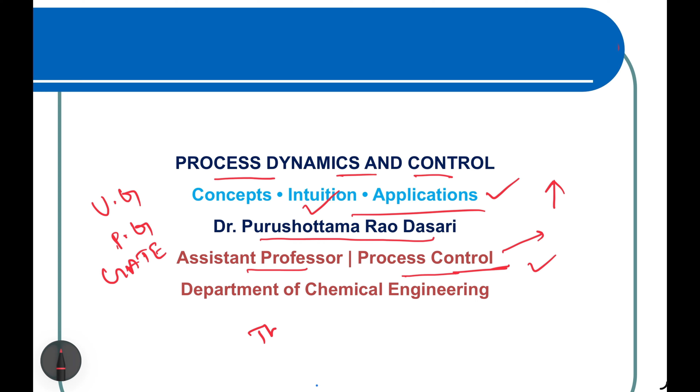This course is useful mainly for undergrad and postgrad chemical engineering students, and GATE aspirants, and anyone who wants a strong foundation in process control. My teaching approach will involve simple explanation, step-by-step derivation, real process examples with applications, and continuous connection between theory and practice.

If you follow this course sequentially, you will be able to understand the smooth transition through this course content. With a brief introduction, let us begin this course.

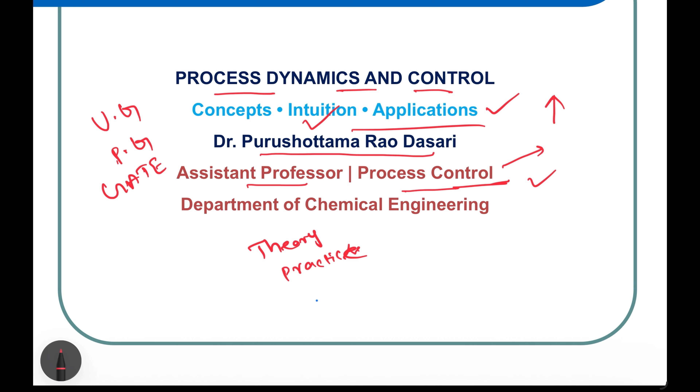In the first part, I will explain the course structure and reference books, and then we will move into the fundamental concepts of process dynamics and control.

Before we begin this actual subject, let us briefly explain how this course will be taught and which textbooks we will follow. In a subject like process dynamics and control, selecting the right book is very important because it shapes the way you understand its concepts.

The main reference book for this course is written by Donald R. Coughanowr, titled Process Systems Analysis and Control. Either you can go for the second edition or third edition. This book is widely followed across universities in India mainly, and abroad. It starts from the fundamentals, explains ideas in a clear and logical manner, and uses examples that are closely related to real chemical engineering processes.

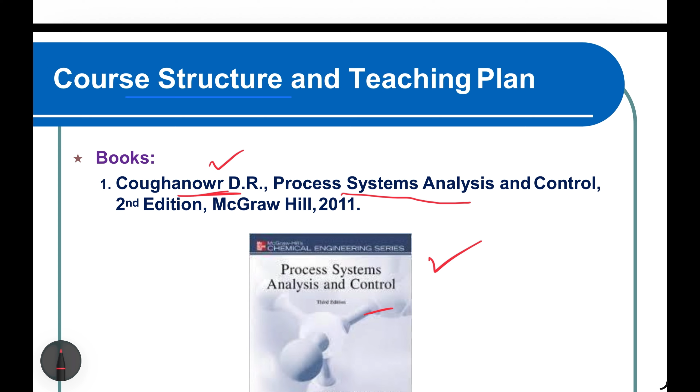I have chosen this book because it helps you understand not only how to solve the problems, but also why process control is essential in real industrial plants.

In my lectures, I will use this book only as a reference and explain all topics in my own words with a strong emphasis on intuition, physical understanding, and practical applications. If you attend these lectures regularly and focus on understanding these ideas, you will find semester examinations, GATE questions, and advanced control subjects much easier and more confident to handle.

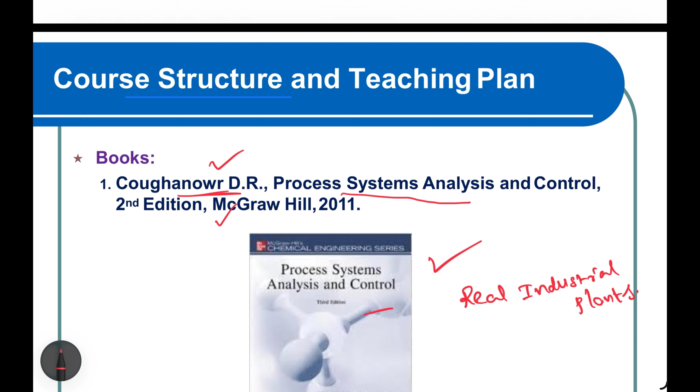We will also refer to this book, Process Dynamics and Control by Seborg. This book will be used only to understand the concepts more clearly whenever we require deep analysis.

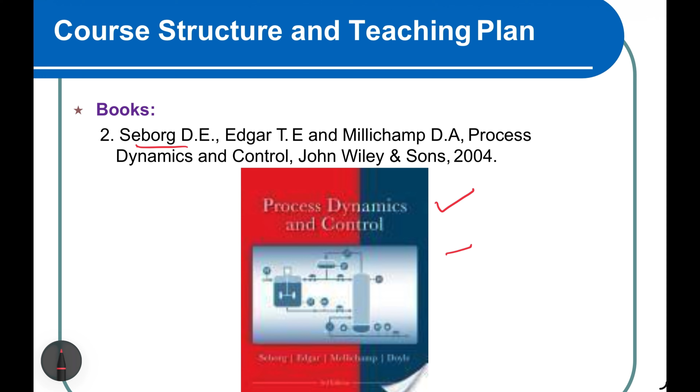We will also refer to the book Chemical Process Control by George Stephanopoulos. This book will be used only for understanding the overall process control philosophy and industrial viewpoint when we need it.

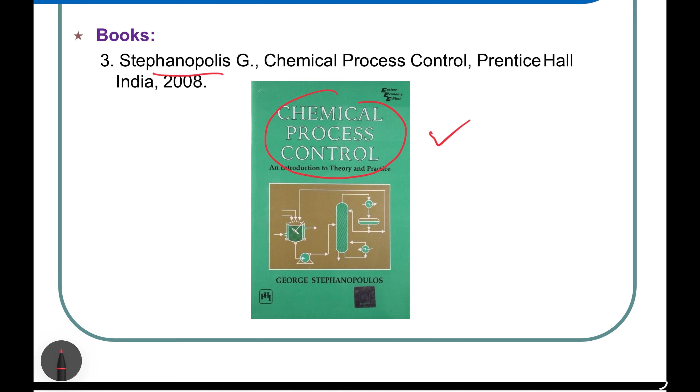We will also refer to the book Process Control: Modeling, Design and Simulation by Bequette. This book will be used mainly to understand the modeling and simulation aspects of process control.

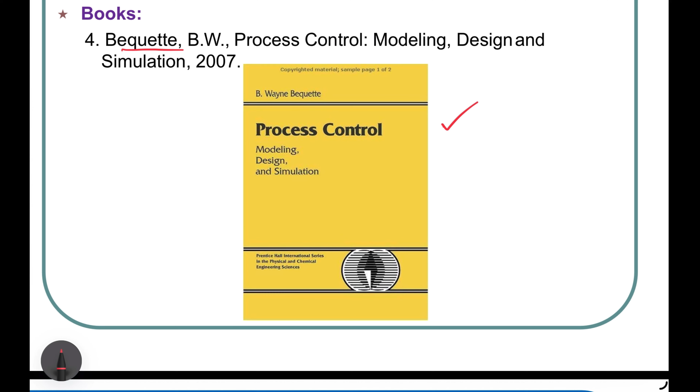Now let us understand what we mean by controlling a process. When we say that we are controlling a process system, it simply means that we are trying to influence the way the process operates. This influence can be in the form of guiding the process or regulating it, so that the process gives us a desired outcome. In other words, control means making the process behave the way we want.

In fact, you may have already seen many examples of control in laboratory experiments. For example, if you take a heating water bath, a control unit is used to maintain the temperature at a desired value, however much we want to maintain it. Even if the surroundings change, the controller needs to adjust the heating so that the temperature remains constant. Similarly, the pressure regulator...

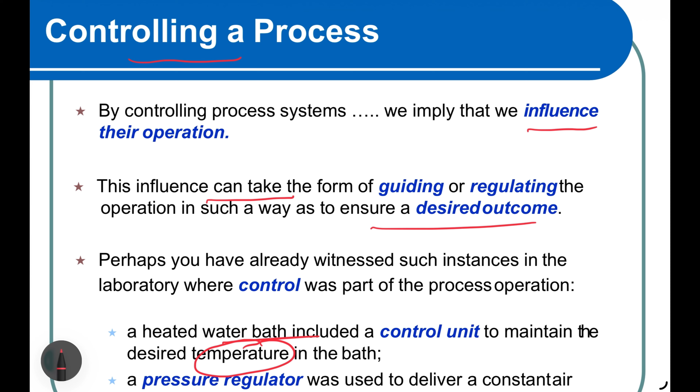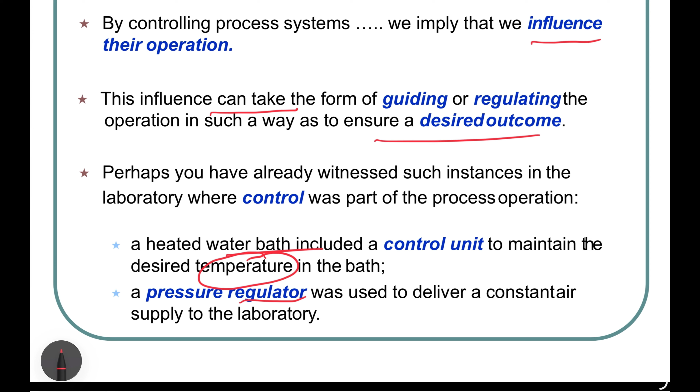It is used to supply air at constant pressure, and remain steady - that's what we want. So these are simple examples, because control is already a part of many process operations.

In all examples we discussed earlier, you may notice that the control unit is always present. The main role of this control unit is to ensure that the process operates in a steady state and in the desired manner - what exactly we want.

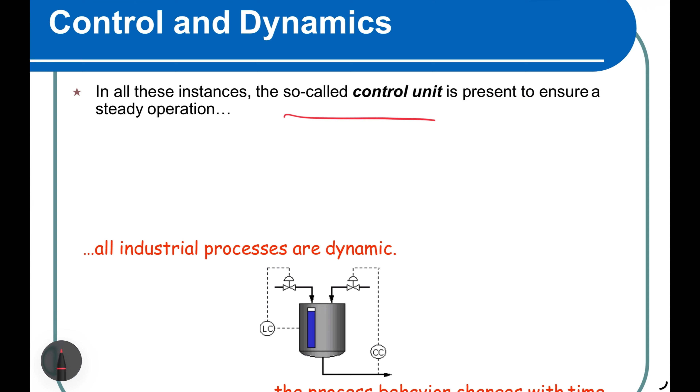However, it is important to understand one key point: all industrial processes are dynamic in nature. That means the process variables do not remain constant automatically.

In simple words, the behavior of the process changes with time. When there is a change in the input, the output does not respond instantly - it responds gradually.

Even a disturbance, such as a change in the feed, temperature, or environmental cause, may make the process vary with time. Because of this dynamic nature and behavior, we cannot rely on the process to remain steady by itself - that is why control is required.

Control is needed to continuously adjust the process and keep it close to our desired operating condition - that means our set point.

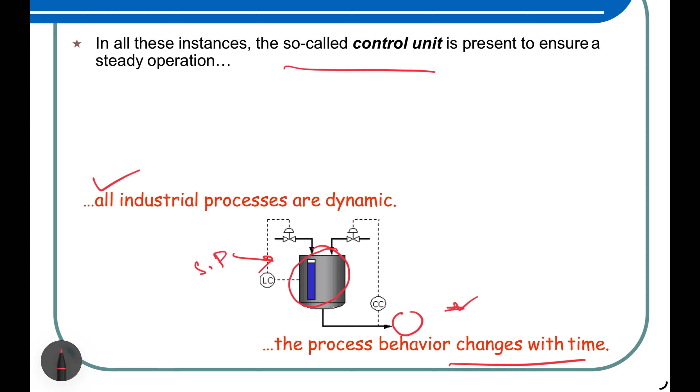Let us see the role of control engineering. A control engineer has two main responsibilities. First,

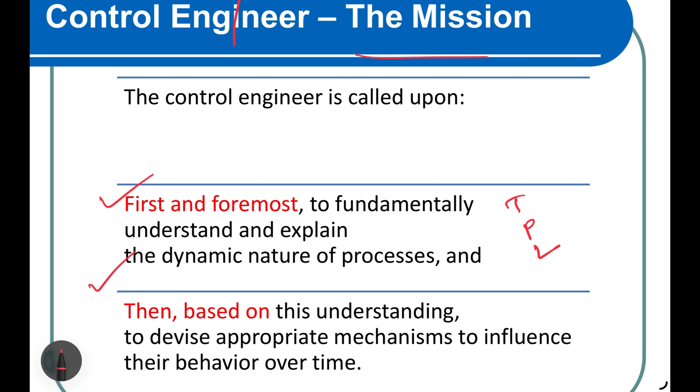the control engineer must understand how the process behaves with time - how variables like temperature, pressure, and level change when there is a change in the input or when a disturbance occurs.

Next, based on this understanding, the control engineer designs suitable methods to control the process and make it behave in the required manner. So simply speaking, a control engineer must first understand the process and then control the process.

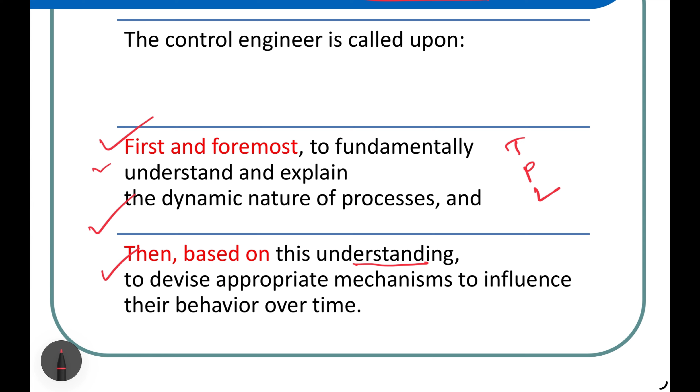These are the main important things for a control engineer. Control engineering is important for every chemical engineer - design engineers must think about how equipment behaves over time,

because real plants do not work at steady state all the time. So plant engineers must handle disturbances and keep the plant running smoothly. Engineers doing experiments must control their equipment properly to get correct final results.

So in final summary, we can say control engineering is needed for design, operation, and experiments.

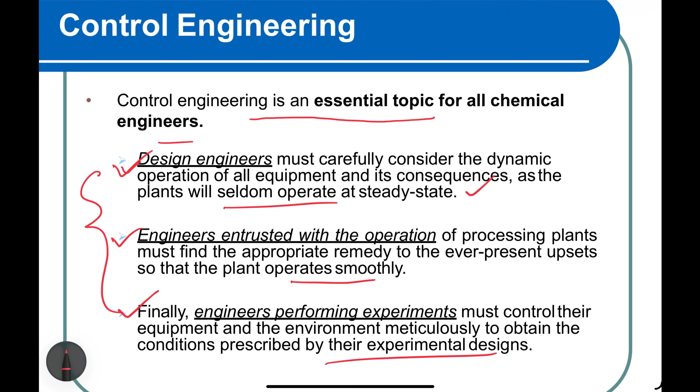Now let us understand why process control is important. In fact, without process control, it is not possible to operate most modern chemical plants. Process control is required to run plants mainly for safety, and it helps the plant operate reliably,

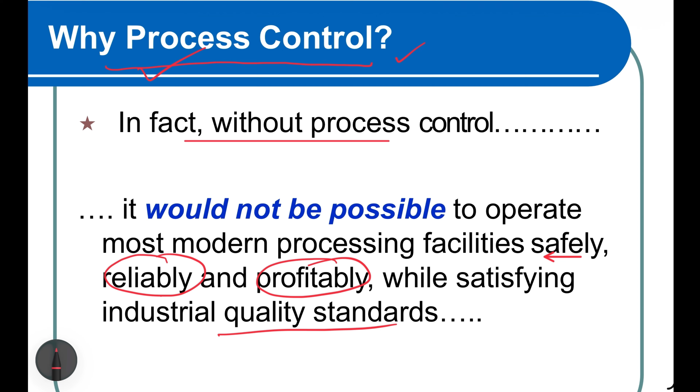without frequent problems - it also helps the plant operate profitably. Finally, process control ensures that industrial quality standards are satisfied. So process control is essential for safety, reliability, profit, and finally quality.

Next we'll discuss control in process industries. Over the years, both the theory and application of process control have changed because of technological developments. With the growth of computers and communication technologies, the role of process control is continuously changing.

Today we can clearly see two roles of process control. The first is the traditional role, where control is mainly used for safety and stable operation. The second is the expanded role, where control is also used for automation, optimization, and better plant management.

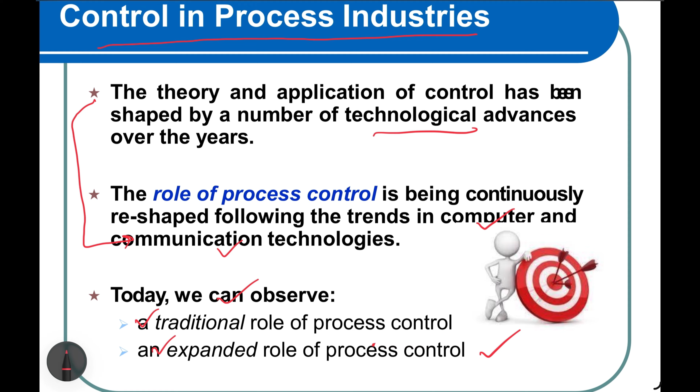So simply, we can say process control has evolved from basic control to advanced computer-based control. Now we will discuss the traditional role of process control.

In industrial operations, process control plays an important role. It helps to maintain safety and environmental impact, and improves process performance. This is done by keeping important process variables close to our desired values.

For example, consider a chemical reactor with a highly exothermic reaction. If the reaction is not properly controlled, temperature can increase rapidly. Many variables can change, and this may lead to liquid overflow or high temperature, which is called runaway. Process control is used to prevent such dangerous situations.

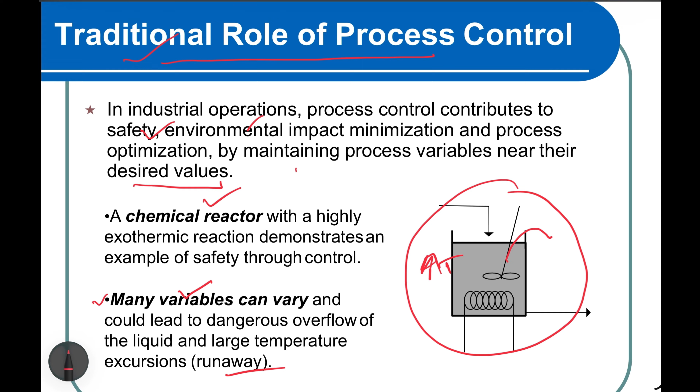Traditional process control mainly focuses on safe and stable operation of the plant.

Now let's see the traditional role of process control with an example. In this example, a control system is used to maintain important variables at their desired values. The first one is the liquid level - the liquid level inside the reactor is maintained near the desired value by adjusting the outlet flow rate. This is done using the level controller.

Next, the reactor temperature. The reactor temperature is maintained near the desired value by adjusting the coolant flow rate, done using the temperature controller. By controlling this level and temperature, the reactor operates safely and smoothly. A good temperature controller also reduces the formation of unwanted byproducts, helping to reduce waste and minimize environmental pollution. So traditional process control keeps the plant safe, stable, and clean.

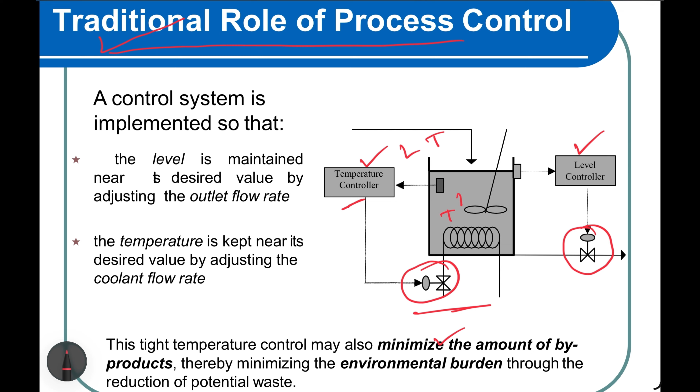Now let us understand the expanded role of process control. A modern industrial plant is made up of many unit operations working together to produce the final product. An important part of such a plant is a control room, where operators continuously monitor the plant operation. Today, computer-based control systems collect data from different units and automatically adjust the process variables, helping to maintain smooth and stable operations.

The main system used for this purpose is called the distributed control system, or DCS. The DCS communicates with field instruments such as sensors and control valves through communication networks. So modern process control uses computers and networks to control the entire plant. This is what is called the expanded role of process control.

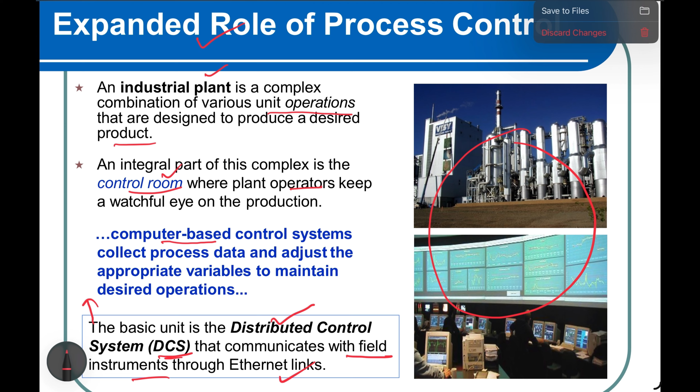Now let us see what is DCS, that means distributed control system, and what it allows plant operators to do. First, the DCS helps to observe important process variables such as temperature, pressure, level, and flow in the control room. Second, it continuously checks for alarms to warn the operator if any variable goes beyond safe limits. Third, the DCS allows the operator to take action whenever required.

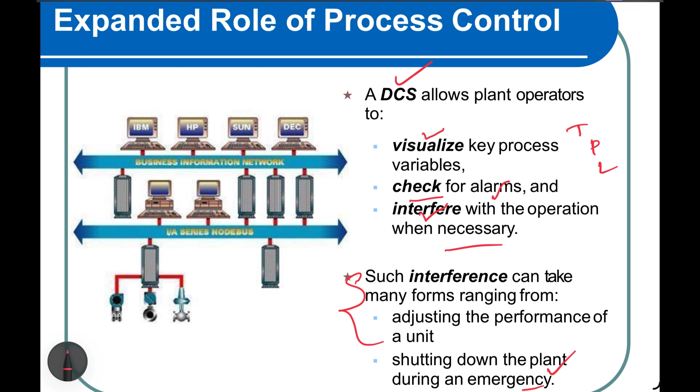This action may include adjusting a unit or shutting down the plant during an emergency. So the DCS helps operators monitor, control, and protect the plant.

This slide shows an example of the control network of a modern industrial plant. Here the control room is the place where plant operators monitor and control the entire process. The computer in the control room displays important information such as temperature, pressure, level, or flow.

The DCS interface shows the process units and control loops in a graphical form. Using this interface, operators can easily understand the plant condition and take necessary control actions. The control room and DCS together form the control center of a chemical plant.

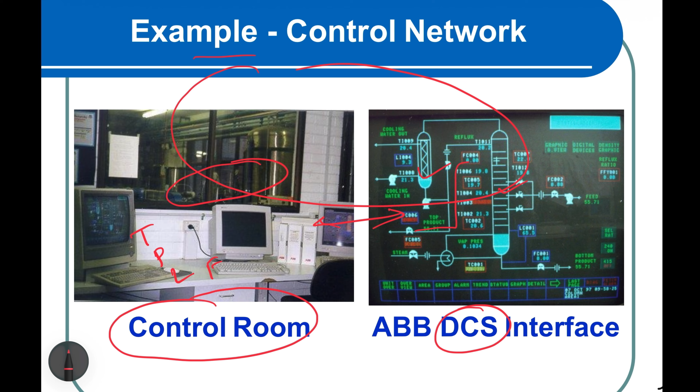Because of advances in computers, the role of process control has expanded significantly. Today, computer-based systems can collect process data and process this information in real time. These systems are used not only for process control but also for online optimization. In addition, computers are used for tasks such as scheduling and production planning. Modern process control covers much more than basic control of a single unit—today's computers play a major role in control, optimization, and plant management.

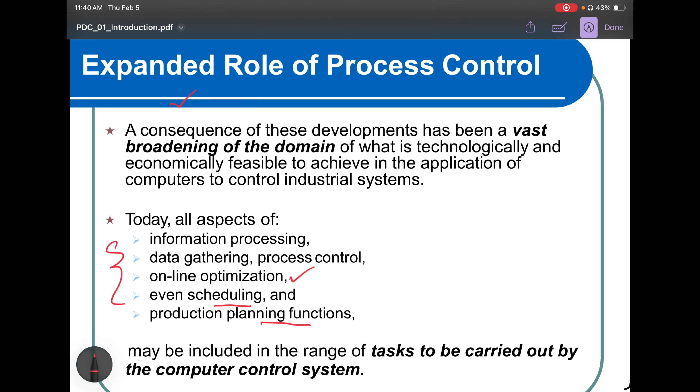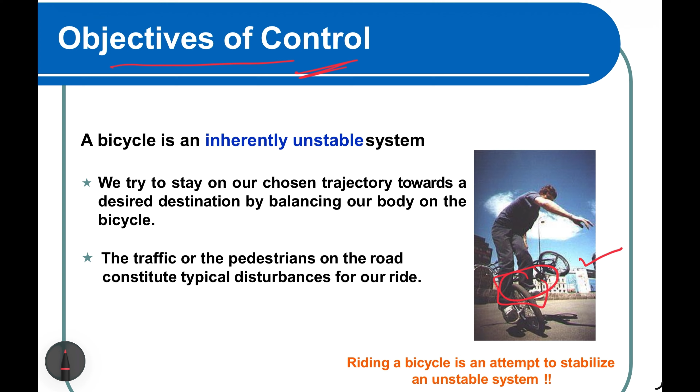Let us understand control using a simple life example. A bicycle is an unstable system—if no action is taken, it will fall. When riding a bicycle, we continuously adjust our balance and steering. Disturbances such as traffic or uneven roads can disrupt this balance, but by continuously correcting our motion, we stabilize the bicycle. This is similar to how a control system works in a process—control means taking continuous action to stabilize an unstable system.

Let us now summarize what we have learned in the introduction to process dynamics and control. Process control helps us regulate the behavior of process systems and make them operate in the desired manner. Good control is very important because it improves safety, ensures smooth operation, and increases plant profitability. We also learned that the role of process control has expanded from basic control to advanced, computer-based, and information-driven control. The main objectives of process control are to maintain stability, achieve good performance, and optimize plant operation. With a clear understanding of process dynamics, engineers can design effective control systems that meet industrial requirements.

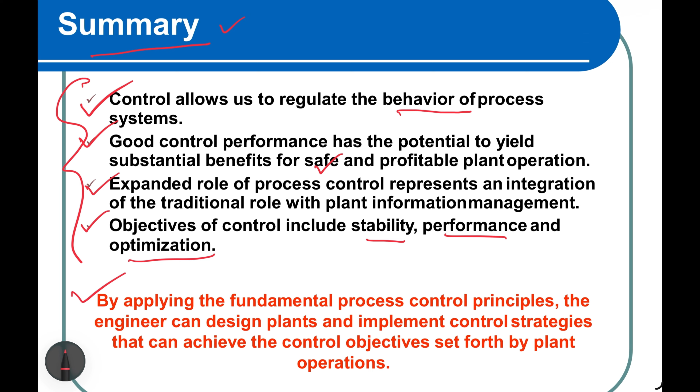This complete understanding forms the foundation for all advanced topics in process dynamics and control.